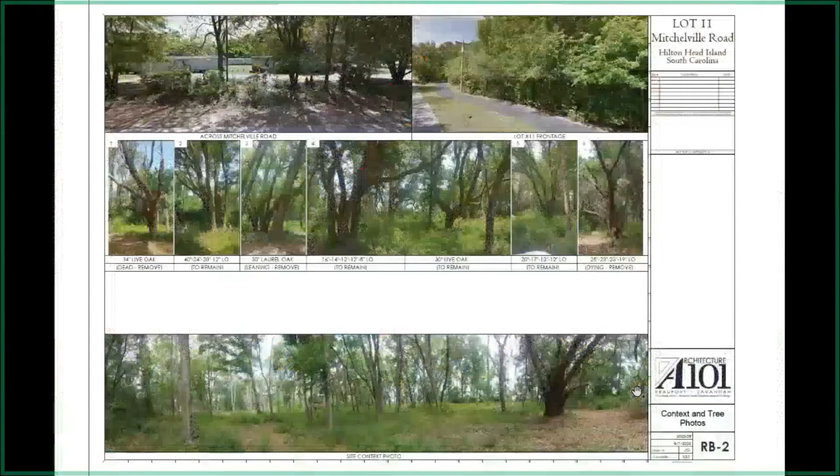Staff recommends conceptual approval with a suggestion that staff comments be added to the Notice of Action as conditions. So here are just some pictures of the existing vegetation on the site.

This is the conceptual site plan. It's included because the significant specimen and significant trees are noted.

This is the conceptual site plan with the tree removals requested, or that will be requested. You can see the wetlands out here.

This is the layout of the 3 buildings, the large one in the back with the 2 out here, and the pool deck. You can see the pool buildings here and the beach access here.

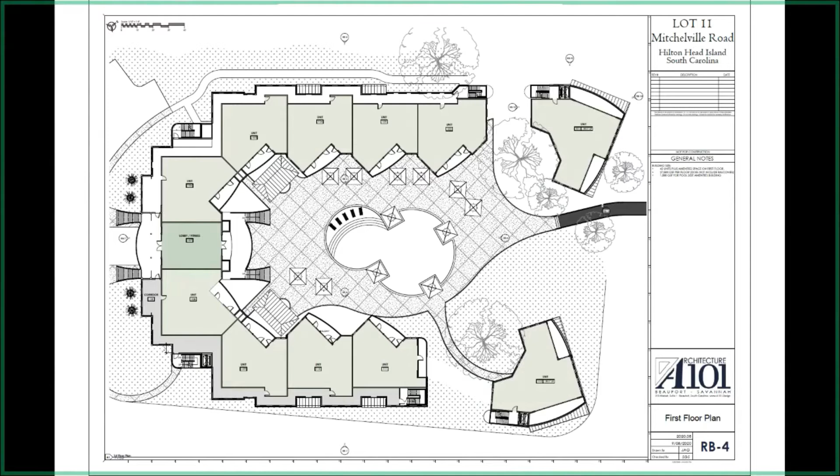This is the 1st through 4th floor levels. This is the roof plan for the development.

Here you can see the front elevation of the building and a side elevation proposed. Again, the rear and a side. A section through the building.

These are the ocean side buildings. Again, looking straight on and a side view.

And looking out towards the ocean at the top and looking back into the development at the bottom. An illustration of the side setback and angled setback.

That concludes staff's presentation.

Thank you, Chairman. Yes, I certainly appreciate the consideration that the applicant has put towards the previous comments. I echo staff's sentiment about the parking circulation still being a little tight, especially for underbuilding. Looking at those two smaller buildings, they seem to be the ones that are the sticking point for that particular item.

Another thing would be just confirming wetland setbacks and knowing that that'll be in final - your setbacks for both your building and your impervious surfaces. I know there's a wetland impact on the front part of the portion, is that correct? That's correct. Okay, we'll just want to make sure that those buffers and setbacks have been respected there.

And finally, I see the 15-foot tree protection zones on the plans, but I'm not noticing where there was a canopy survey for those significant trees. Knowing that these trees are kind of in a wooded condition where they're probably more upright, especially seeing some of the photos, it looks like they're more of an upright condition. It'd just be nice to know if there's going to be some significant limbs or something given that you're going to have these tall structures surrounding these trees. If it really is going to be a greater impact to those trees, considering the proximity to those buildings, having a canopy survey obviously helps to understand the limits and what's being impacted there.

And I realize that would be at the cost of more units. I think that's still the challenge, from the views that one's really going to see - the public is going to see it a lot from the beach - and from that, massing wise, to me it still reads very much like the last submittal.

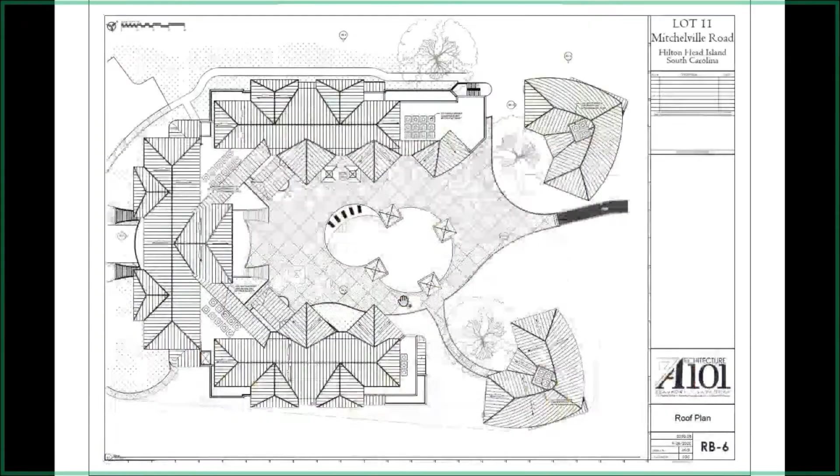I do appreciate the move of the pool building being backed up against the building, and therefore opening up the views both from the beach and also for the residents, completely out towards the beach. I think that's a really good move relative to where that pool house was one larger structure sort of blocking those views. So I really appreciate that move.

I had a question, this is probably more for Chris, on the west elevation angle setback - I'm not that steadfast - is that allowed to cross over into the roof overhang? It's my understanding that yes, that eave can penetrate into that setback, but I will check that. Okay, that was just something that kind of caught my eye.

It still just feels like a very massive building. I'm wondering if an articulation on the surround of the garage level would help break that down. I think some of the things that are working well with helping with the massing are those dark brown vertical elements that are piercing through all the way down to the ground. I also see that you took some of the base material and brought it up one floor. All of those things I think are helping. I think the facades where it is identical on all four floors - those are the ones that are still hindering the massing from feeling less large.

If you could turn to, I believe it was sheet RB 12. Perfect, thanks. And again, I understand this is just a rendering here, but when I look at the top picture...

I think that's probably the best example of the plainness. I love the front elevation, I love what you've done there, I think that breaks it up a lot. But looking at that top picture right there, seeing all that horizontal lap siding with the white trim around the windows, it looks very much like a tract home, production home, which I'm sure is not your goal because so many of the other elevations just look so much more exciting than that. And perhaps this is just this one perspective, but I think that's a very good example of where the project still has room for improvement.

Looking at that same sheet, RB12, the bottom picture, the elevation facing the ocean with all the sliders and railings on it, I think that looks great. It breaks it up. But the outside portion seems like a large expanse of 4 floors of nothing but horizontal lap siding with white windows. Maybe take some of the interest you have in the other elevations and apply it there, whether it be a different color on the first floor to break up the massing, or introduce some vertical elements that tie the windows together. I think there's an opportunity to make that a little more interesting.

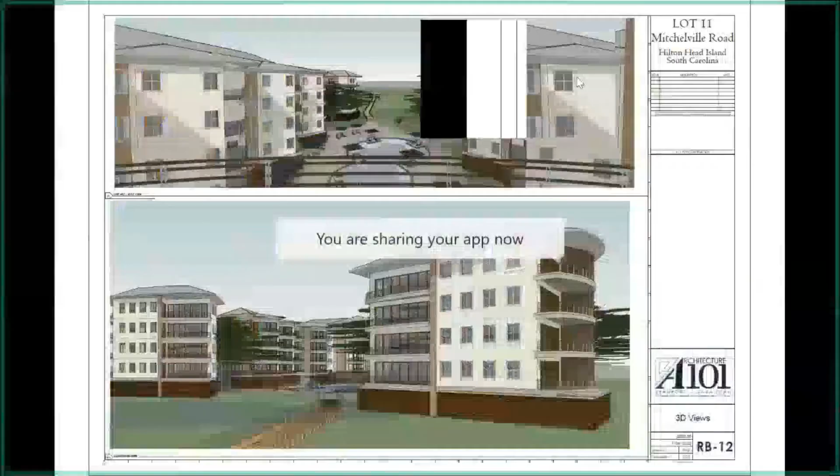I wasn't here the last review, so I don't have a lot to comment on how it's changed, but from my first visit, I'm really disappointed at how austere it is. It's a beachfront place, it needs a lot more texture, a lot more in and out, a lot more activity with the surroundings. It seems like there's a hotel right on the beachfront, and Mitchellville, especially in that area, is all natural, and this doesn't appear natural to me in any way, shape, or form. I'm not discounting your architecture, I think it looks lovely, but I don't think it looks lovely on Mitchellville Road on the waterfront. If you could have different textures, different roof levels - I understand you changed them from what the board suggested last week, but I'm still feeling this is a big, solid structure without reference to the environment. That's all I have, thank you.

Okay, thank you Ms. Foss. Kathy, since you weren't here last time, what is your feeling on the scale of the building? Too large.

It's just dominating that beachfront. As I said, it's all natural there basically, and it dominates it and takes front stage when we don't need that here. Okay, thank you.

Yeah, I'm going to sound repetitive from last time. I think the building looks great. I love the plan, I think you did a great job laying it out. I like how the pool's secluded. I like how all the units have views. It all works for me. I just wish your lot was 50% wider.

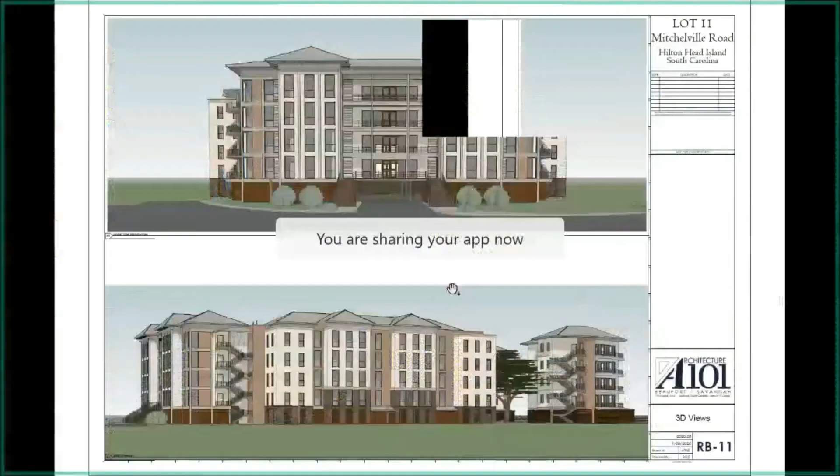that in itself isn't really the solution we were looking for, I don't think, because we want roofs, we don't want flat roofs. So I'm pointing, and you guys can't see what I'm pointing at, but that bottom drawing to the right where it turned into a flat roof - there we go - it didn't help the cause because it's still a 5-story wall.

So my thought is, and to put this into scale for everyone, those that were here for the Gardner Drive, just for comparison purposes, the old or current Christian Academy site that we reviewed - I think probably half of us reviewed it - those were 3 stories and 4 stories total. These are 5, and I just think it's too tall.

I think that front elevation's attractive, I think that could actually maybe stay as it is because it's the short side of that building facing the neighbors. So they're seeing only, if you look at that bottom left drawing, the neighbors are really only seeing the side elevation on that particular building. It's when you turn the corner, parallel to the lot where the cursor is, that stretch right there, it's right up on the property line, and it's just big. I think that needs to be a story less.

Judd, I have a question for you. But before I ask, I think there needs to be a little bit more room between the fire lane and the face of the building. Right now it only looks like, if you could go to a site plan... yeah, right there, that to me doesn't look like enough space to get in any type of foundation plantings. One of the drawings had an arrow pointed to it that said foundation plantings. I'd like Judd to comment on that.

I don't think that's enough room to do anything to help soften a 5-story building. And then particularly on the fire lane side, even the buffer, was that 10 feet? Can we get anything in a 10-foot buffer to hide a 5-story building or help obscure it? Judd, that was kind of directed at you, could you make a comment?

Yeah, Judd, go ahead. In a word, no. I mean, obviously, when looking at a large building...

You want to kind of, especially when you think of those buffers, it's almost easier to front load those and load them towards the property line, because that is the foreground for anybody outside of the site. Yeah, I mean, it's going to be hard pressed to get anything up against the foundation that's going to have any kind of height. I mean, that drawing on the bottom left is a dead giveaway for that little dinky green spot right there.

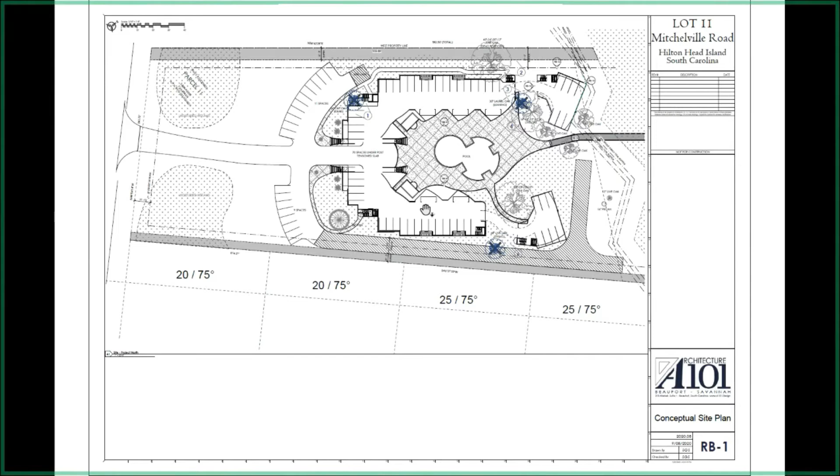I'm trying to remember what's in that buffer specifically. There are certainly some trees in that buffer. I don't know that there's any large trees in that buffer. I mean, if those trees are there, and you fill up where the trunks are, then it makes a case, but I don't know that they're there.

So, all right, I can confirm if you'll give me a second. Okay.

All right, I got it. There are, down that line, a couple of water oaks. There's a 36-inch pine right on the property line. There's a 48-inch live oak adjacent to the property line on the other side. There's a 30-inch pine, a 24-inch pine, and a couple of smaller cherry trees down that buffer. And that's, I got it here too.

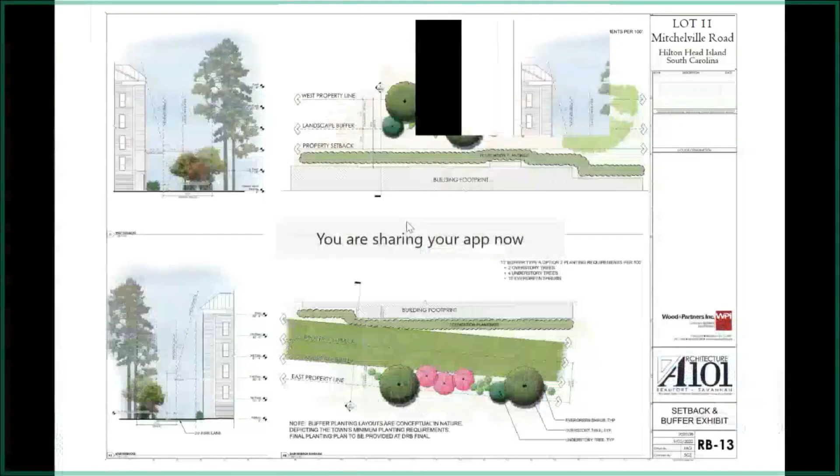More articulation of the windows in the pool courtyard facing away from the ocean. Steve, that was from what I remember - there was a big blank wall that had no windows in it. Did that get covered, right? Yep, yeah it did. Okay, so you took care of that one.

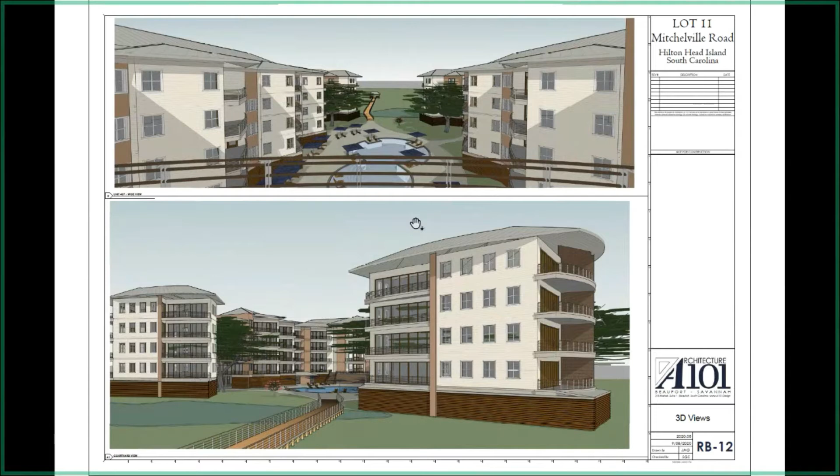So the big one is the next one, the more variation in the height of the roof line, and to mitigate the building height. I still think that needs to be addressed. The HVAC units are on the roof - I saw them on the plan, hidden, which is nice. Additional information on the wetland buffer, and Judd had also brought that up in his comments. A further developed landscape massing plan. The specimen trees we addressed, but that will have to go through BZA approval. And then what we all want to see is the planted tree should be a larger caliper than the minimum requirement to balance the scale of the building.

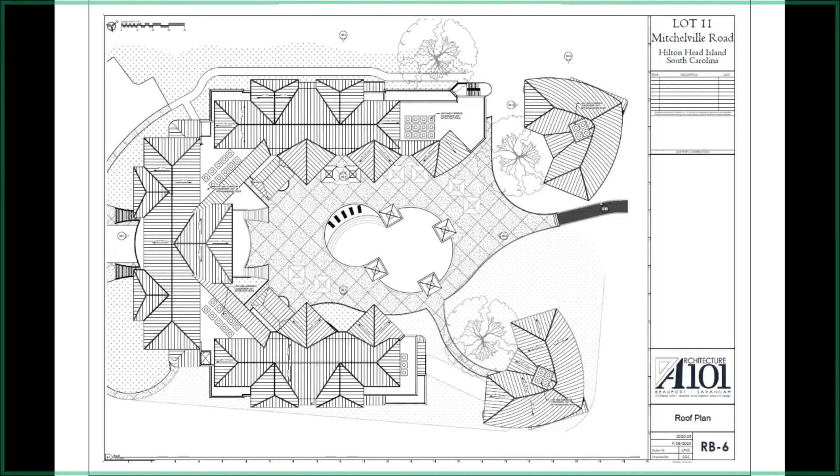So what I'm going to do is open up the floor, unless anybody has any final comments. What if I could, Mr. Chairman? Yeah, go ahead, Steve.

I was going to mention, speaking to the 4 stories versus 5 stories - we did study dropping the scale of the buildings down in several ways, especially towards the end as it stepped down towards the ocean. And we ran into some very tangible, very practical egress concerns in terms of where that egress stair would come into, and not having to have 2 or 3 different sets and dead-end corridors on the long end line. So I didn't want you guys to think we didn't take your comments to heart, because we did study that. Particularly I was trying to step down the building at the hinge point, because I thought that would actually work really well to de-emphasize the scale of the building. And again, we ran into the same very tangible issue - you still need a 4-story or 5-story egress stair out of some of those portions of the building. So I wanted to mention that.

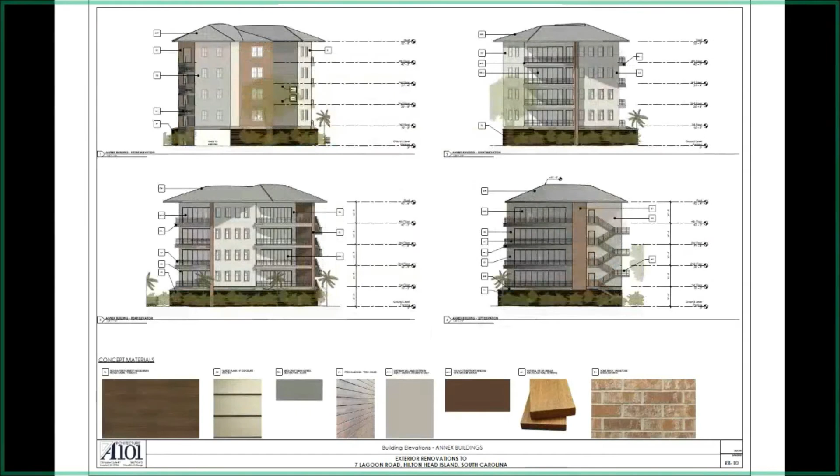What if, like I said, you didn't shrink that top elevation - what if that was there and the stairs were what they are, and then on the bottom, that next building is a story less, and the building to the right is a story less. When it comes to this, is there any way that the garage, or the driveway and all that area, could come up? Yeah, I think it's just a little flat when it comes down to it.

But hold on one second, John. Getting back to making sure the side building—I understand having some low areas, I just want to make sure that there's good.

Wait, who is talking there? Couldn't tell who was talking. Can everybody hear me? I think that was Judd, but I don't know. He was talking to the group. Oh okay, alright, you kind of threw me off.

But if the side buildings were one story less, you still have the stair there in the corner, correct? Unless I'm missing something. That's correct. Okay, yeah.

Okay, that's fine. So the two kind of separate structures closest to the ocean, are those the two buildings that Michael was suggesting to drop down one floor less? I think everything parallel to the sidelines has to be dropped a story, so it's that whole length. Okay, not just the two separate buildings closest to the ocean, because it's that particularly main mass that is, for lack of a more creative word, massive. It's just too massive. Are we able to switch to sheet RB11?

Did we catch you napping again, Chris? Or are we able to switch to RB11? If you could give me just one quick minute, if you don't mind. Okay, please. I'm sorry. Thank you, that's fine.

So while we're waiting on Chris, I don't know, am I unmuted? Yeah, okay. I do want to say that I would be remiss if I did not say that while I respect the fact that scale is a concern with this project, the loss of the top floor may very well push this beyond the point where it would be economically viable. So I know that's not your concern, but I do think it needs to be noted. Okay, yeah, I mean you're correct—that's not part of the design guideline consideration, proforma, and things like that. We're just strictly aesthetics, colors, and scale. So, but it's been noted.

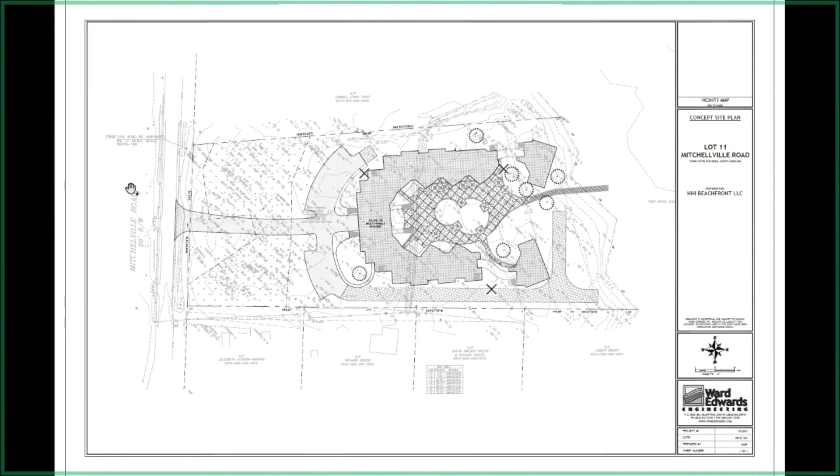I don't necessarily have any divine intervention here, but there was that one elevation where it looks like you brought some of that darker color up to the first floor. I don't know if it's physically needs to be less than 5 stories, or visually it just needs to appear less massive. On RB11, you see in the center how that darker brown color is pulled up a little higher. With a proper landscaping plan, it might visually only read as if there are 3 stories where you see the lighter shade. I don't know if that would be a happy medium that allows the client to get their density, so financially it makes sense for them, but at the same time, visually it just doesn't feel so tall and top heavy, for what that's worth.

I think for me, the key to getting behind the massing is really those 2 detached buildings having to come down a story, that would be my bare minimum. On the side elevations I still think they are massive, but bringing up one floor like Mr. Milewski said does help the massing. Without those 2 detached buildings losing one floor, it feels like none of the other massing elements or changes have been enough. Trying to be realistic, I realize we're not factoring in ROI, but that step down of those 2 buildings would let me get behind them.

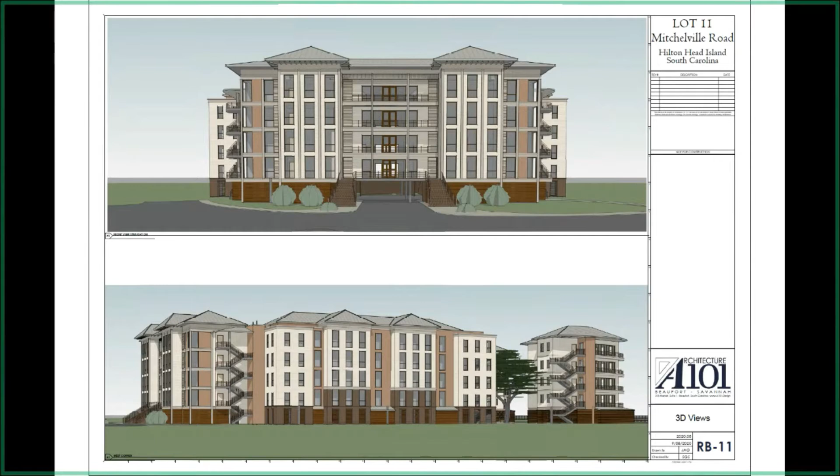Okay, all righty. Would anyone like to make a motion? Okay, I'll make a motion then.

Okay, here we go. Regarding Mitchellville Lot 11, DRB 001801-2020, motion to approve with the following conditions: all staff comments are added to the NOA as conditions. Those include, for reemphasis, that all wetland setbacks are confirmed, a survey canopy of the specimen trees is provided, consider additional ways to bring down the scale of the building, including materials or design elements encapsulating the first two floors to break up the massing. It's not a requirement but an alternate would be appreciated. And applicant to consider 4 stories instead of 5 in any areas possible.

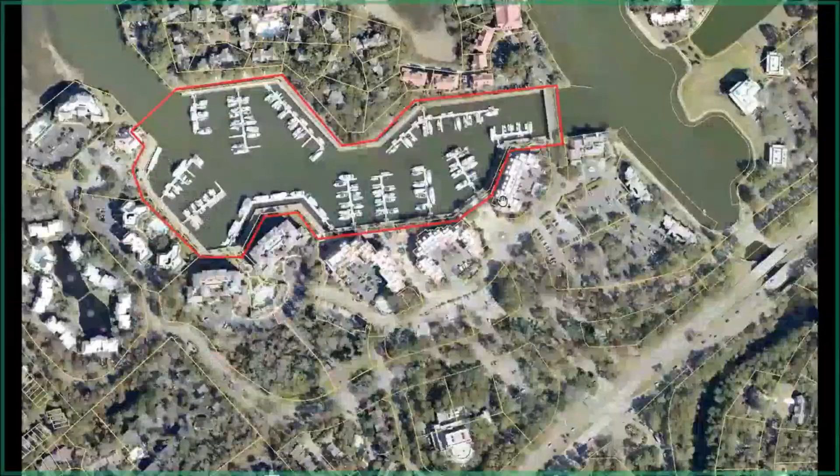Phase 2 was basically from the middle of the harbor, where, if anybody's familiar with it, Captain Hook sits, the boat, all the way to the Disney Bridge, and then next year the Disney section. Yeah, it's just not feasible budget-wise to do it all in 1 year.

Okay, so on your submittal, even if it's that plan marked up and some of those lines are red and the red lines are phase 1 and the blue lines are phase 2, can you make sure we know what's what for our consideration? Yes. And then we'll also need a scale drawing with dimensions of a 12-foot section of this.

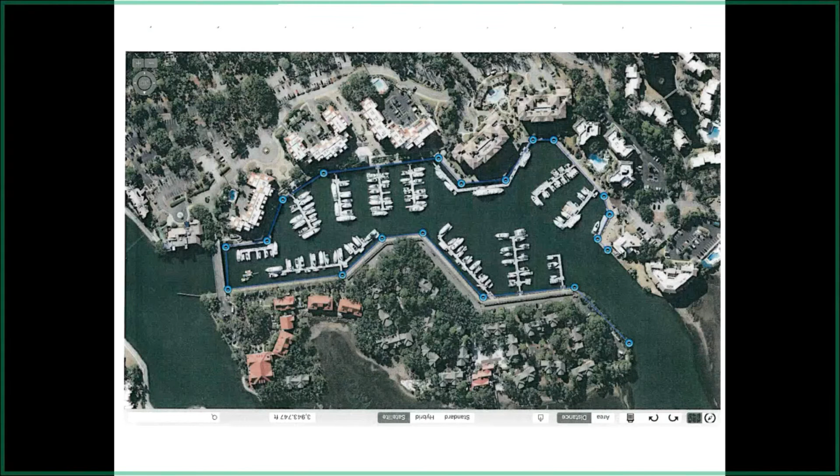And from what I'm gathering from everyone, if you took that heavy middle rail and raised it up to the top and replaced that rail with a cable, painted it in gray, I'm pretty sure you could get that passed. Anyone disagree with that comment?

Ms. Voss, go ahead. I don't think if that middle rail got moved up to the top, it needs to be that big. It should be probably half the height. If that's a 4x4, maybe it's a 2x4.

Okay, and then the reason that, and I agree that you copied what was existing, but the reason the existing middle rail kind of works is that it's got some carving out and it has a little bit of curve to it where it meets the vertical post and narrows down a little bit. If you can't do that, then I agree.

Just take it away, move the little narrow piece up to the top and do something at the bottom. But it's up to you to figure out if people are going to be able to climb up on those things. Thanks.

Okay, thank you. All right, Mr. Molesky? And not to play designer here, but if we were to change those vertical components to every 8 feet...

I believe that in the interim, every 4 feet, there's approximately a 1 inch diameter stainless steel spacer that could go in there to keep the cables from sagging. And I'm sure from an engineering point of view, directly underneath the grab rail, they could put some type of quarter inch or half inch support that would provide the structural integrity, and then the grab rail would just be aesthetic. The reason I say all that is, to me, that is more in keeping with a current railing design, instead of trying to copy something that was done 20, 30, 40 years ago. But thanks for listening.

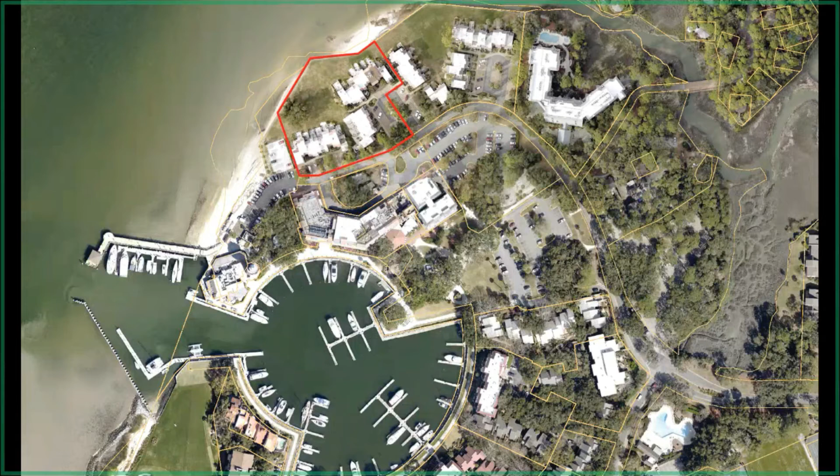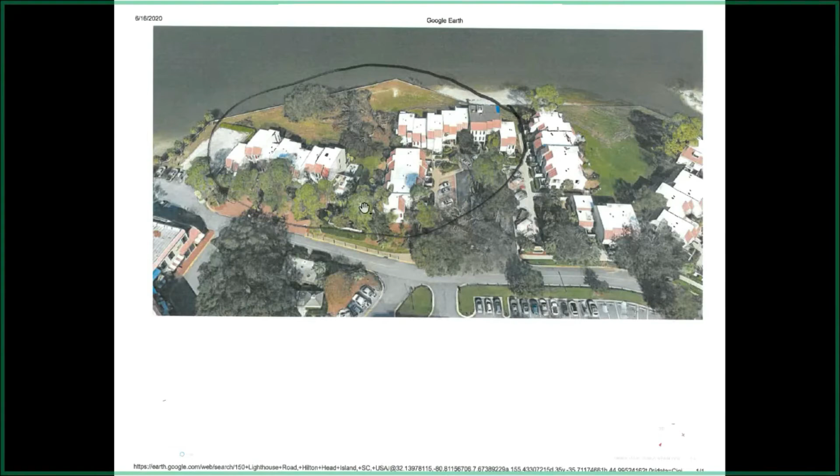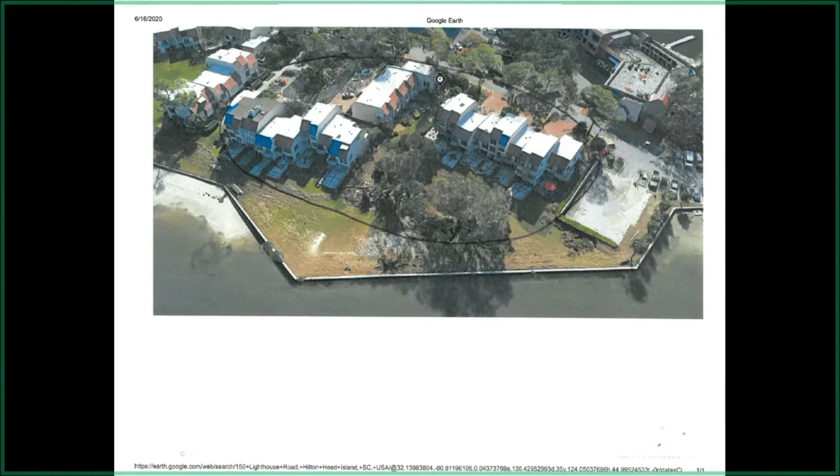This is an aerial of the proposed site. I believe the unit is right here, it's this unit right here. We'll get a better look at it later. Again, it would be the unit right here. Just an example of the 3 stories in this development compared to the 2, and there's 2. Just 2-story here, going to 3 and 2. I'm sorry, let me back up here. I believe this is the picture of the unit in question right here.

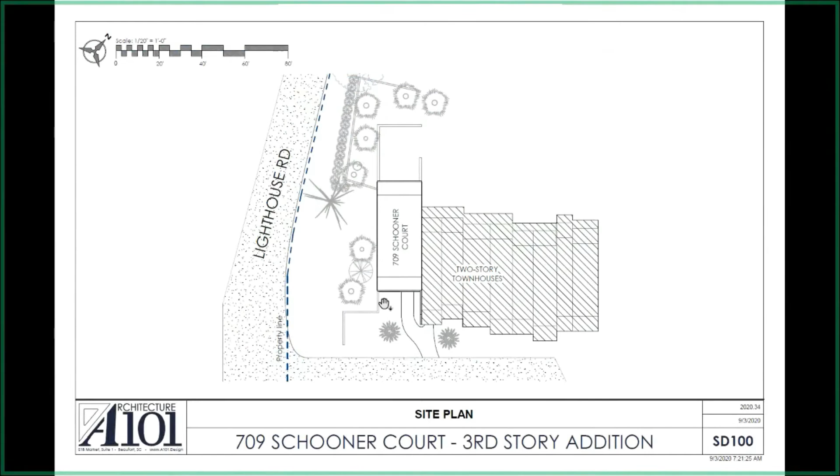So this is the unit. Again, you can see Lighthouse Road. There's the proposed floor plan, wall sections, the existing conditions, and what's proposed.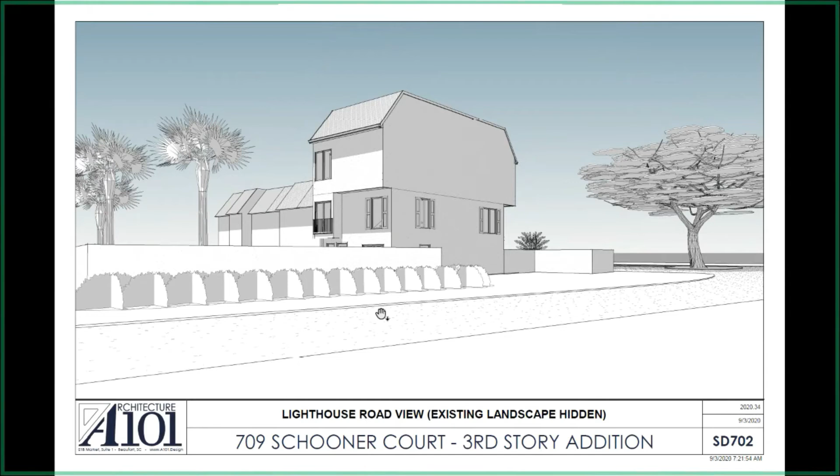So this is the existing front and side, the Lighthouse Road side, and what you would see once it's complete. The back side of the building and the opposite side, and what it would look like once complete. That's the front side, parking lot side, and the water side.

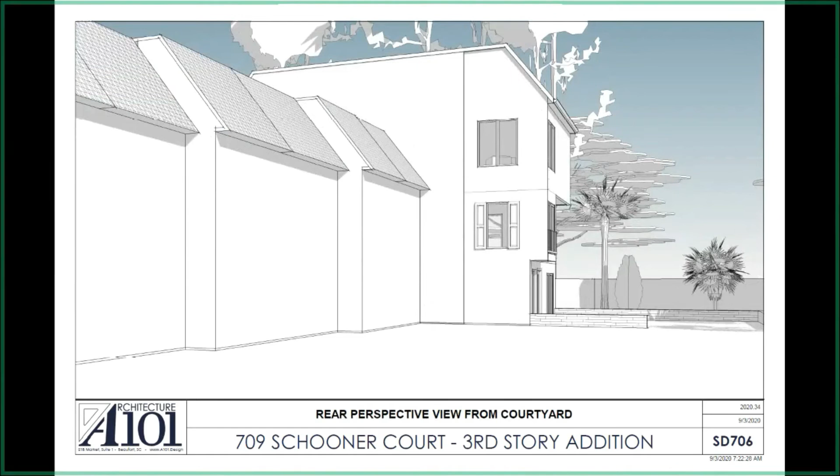Again, staff recommends approval with the conditions stated.

Chris, question for you before you leave us. These are the same units as the color change, right, from last time? Yes, sir, that is correct. Okay. And I think that was only, okay.

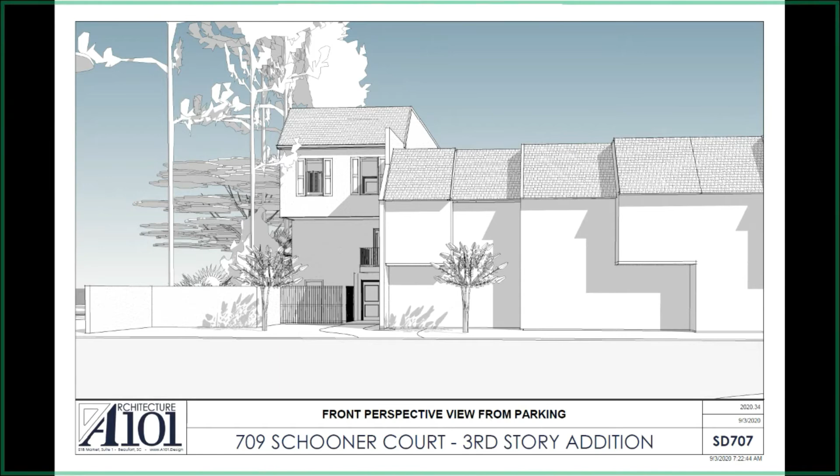So when you say window frame to match existing window frames, shutter to match existing, that's going to all be per the new approved color scheme, correct? Yes, sir. That is the thought process. Okay, I just didn't know if we needed to specifically state that in a motion, which I think we should, that it will match the new approved color scheme.

Does that sound like a good idea to you? Yes, sir. Staff loves clarity. Okay. Be specific. All right.

Is the applicant present? Is Steve on? Yeah, I'm here. We get Steve again? Yep. All right, I'm here. Hey, guys. Yeah, we can hear you, Steve.

So you know how this works. You have 10 minutes. Would you like to add anything to Chris's narrative? No, the only thing I would add is that the local regime was very clear that they wanted it to match the existing units as closely as possible. So we also tried to take our lead from several other projects that have already done this exact renovation. So most of the architecture you're going to see matches what's there and what has been done previously.

Mr. Chairman? Yeah, go ahead, Chris. There's a point that I missed. This is pending approval from Sea-Pines ARB. It's my understanding that it's in front of Sea-Pines ARB as we speak, but per the LMO, we need to get a determination from an ARB prior to your all's review. So this is moving forward as for comment and courtesy to assist Steve with design so that he can move forward with that, and we'll be coming back for final approval.

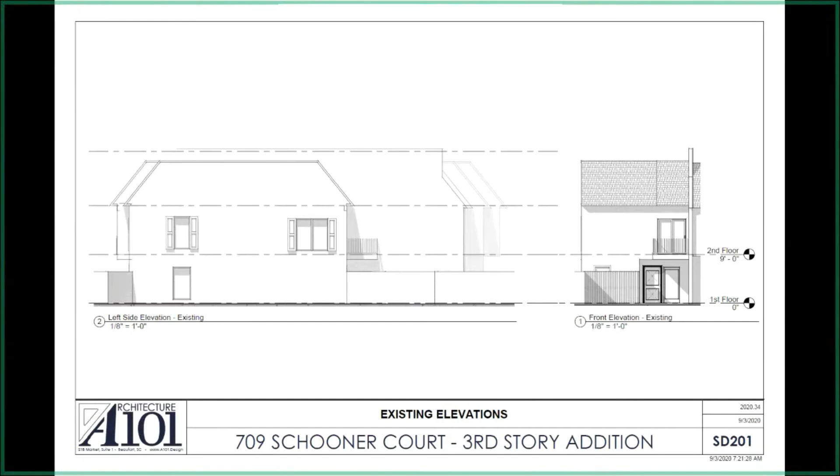Yes, proposed. Because to me, this unit is unique in that it's parallel to the road, I would like to see some articulation on that blank wall. Everything else I'm fine with. I think it does a good job of matching what the other ones have done.

The only other question I have for Steve, and I know we're not reviewing this, but it affects the aesthetics: have all the firewall conditions already been addressed as far as whether something has to get extended, or are you just doing it horizontally? I know you can do firewalls horizontally 4 feet, but it might affect the adjacent units. So I'm asking if there's anything on the elevations that might change due to the firewall of the raised story.

Let me take those. The firewall, we believe we have taken into account on all sides, because we have a higher roof line than our adjacent units, so that firewall does carry on. The other side, it is a two-sided firewall, as you would imagine.

On the Lighthouse Road side, it's our owner's strong desire not to have windows on that facade, simply because there's a hotel that directly faces it, so if they do have windows, they're going to be closed all the time just for privacy's sake. It would be a window just for the sake of the exterior, so we're proposing it this way to avoid having a window that really serves no function.

David brought up a good point about that one window being above the other one and not having shutters. I understand the issue of wanting more light in the space, but we already had comments when this project first came before us that there was so much going on with all the canopies and different balconies and fences. I would like to see more standards brought into this, and if you've got a window, it needs shutters, in my opinion. That's what has already been brought up.

I also agree with staff's comments that the windows, shutters, and approved color schemes need to be matched. Thank you. Okay, thanks Kathy. All right.

Annette: could you put that elevation back up, Chris? It was just up there—the right side and the rear, I believe.

Everyone's comments continue to progress, and I agree with all of them, with Annette doing a lot of the heavy work there.

The window on the right side elevation relates more to the one below it than the one on the rear, so I don't see why those two that have arrows next to them would need to match. I think that window needs to match the one below it with the shutters, which I believe was Kathy's point.

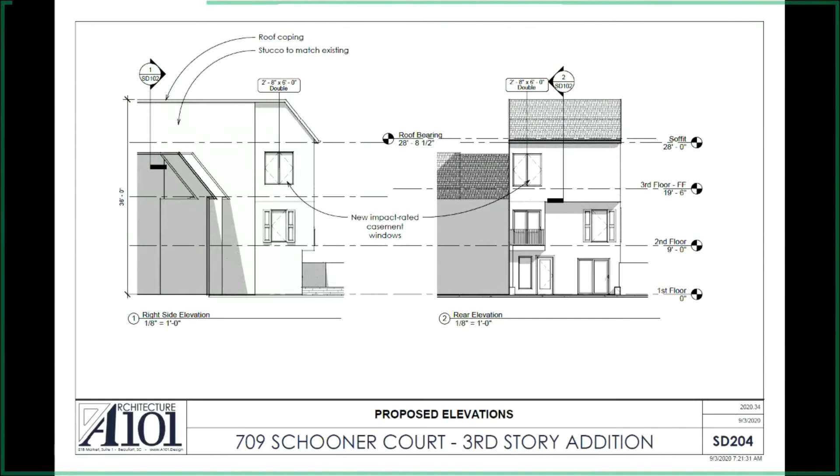Then on the left side elevation, right there, total agreement with everyone. Third floor needs to have windows. I know they don't want the hotel across the street to look at them, but they already have windows on that side, so I think we need windows that fit the pattern of what's there.

One of my personal pet peeves is shutters that don't fit the window, which would be the double window to the right on the left side elevation. I would either do no shutters, since that's more like a door than a window, or do appropriate size shutters that are different from the other one. I'd probably just leave shutters off that one given the size of the window.

And the third floor windows, whether there's two or three of them, should appropriately align with that elevation because it is very prominent on Lighthouse Road, and it actually sticks up above the privacy wall and the landscaping, so you're going to see that.

I think that was pretty much a universal comment that there needed to be something up there, but I would go the full step and do windows rather than try fake shutters or anything like that.

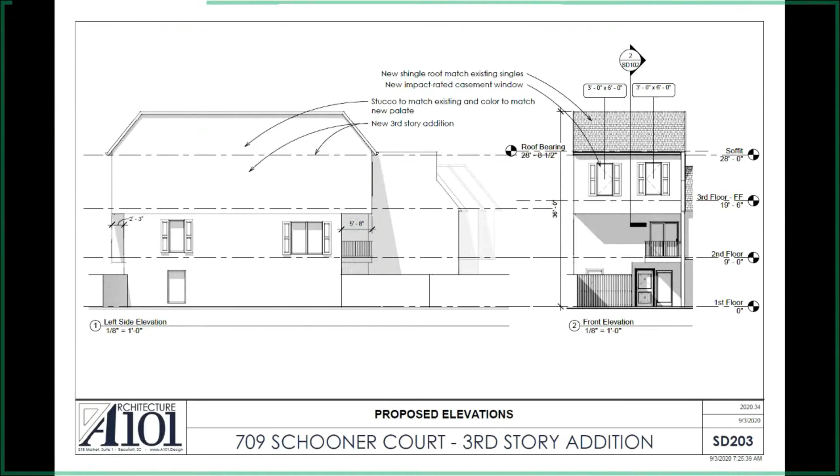One thing I'd bring up, Chris, if you could show that 3D view - I sent a photo of the existing landscape condition along Lighthouse Road. There is a very large tree on that side of the building, so the windows we're talking about adding on that third floor are really not very visible at all. I did try to match that tree as closely as possible for this rendering, and you really cannot see that third floor from this perspective. I wanted to add that to the discussion.

Well, that'll give them more privacy than from the hotel. Yeah, I don't think they're going to win that argument with us. I think we're going to need something there, and I think that's the right answer - something just needs to be there.

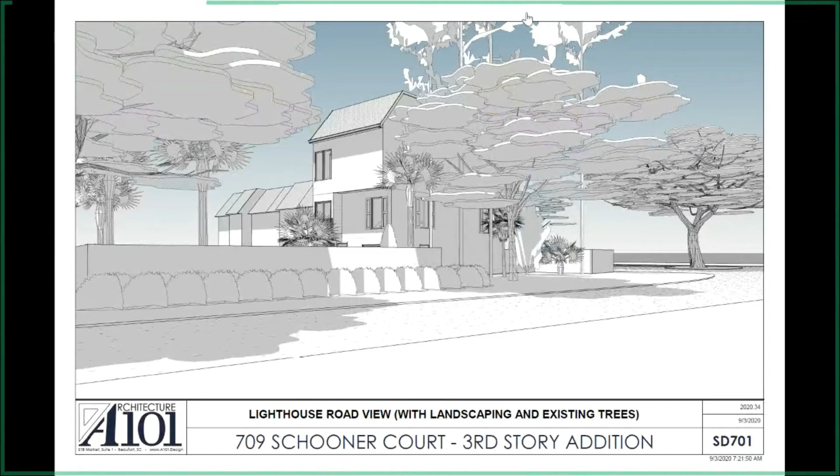Annette, you have your finger up. Yeah, just to explain that - I don't think we can count on a tree. All we need is a storm, or that tree to get sick and die, and now we have this massively exposed facade. So I think we have to consider that the tree could disappear. Yeah, and that's pretty much a DRB staple, that you can't rely on the landscape.

All right, Chris, do I just table this, or do we need a formal withdrawal? What do we need to do here procedure-wise? If the board will entertain a table, then you can table it; otherwise, the applicant will need to withdraw. Just a reminder, if the applicant withdraws, he essentially loses his application fee, but with tabling, you can preserve the application fee. All right, we'll do Steve a favor and table this so he can save his application fee.

I would just like to reemphasize that we are tabling this pending the outcome of the Sea Pines ARB review. Would someone like to make a motion? Annette, go ahead please. I'll make the motion that we table this pending Sea Pines ARB review and recommend that the applicant has heard our comments.

Application 001794-2020. Mr. Karstens will be recusing himself from this project. Yes, sir.

And Chris, would you like to take it from here? Yes, sir, thank you, Mr. Chairman.

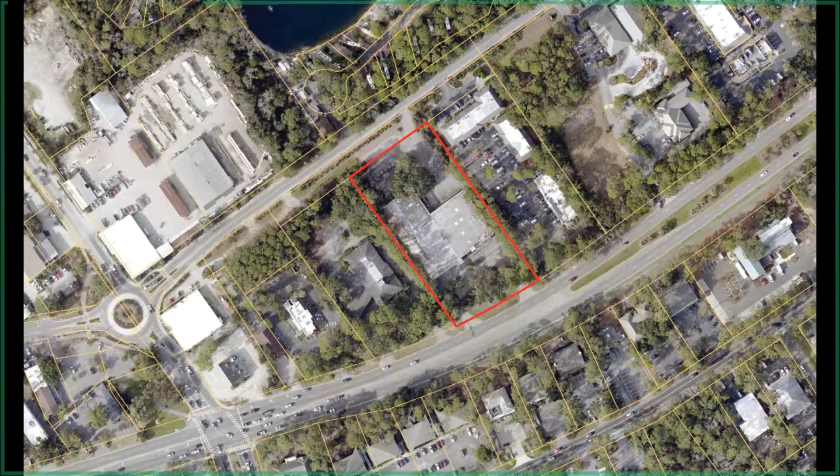This project proposes to redevelop the 2.3-acre former Grayco hardware property on William Hilton Parkway into a multi-story, climate-controlled self-storage campus. The site contains 2 specimen trees and 4 significant trees.

There is a 20-foot side building setback and 50-foot setback off William Hilton Parkway, along with a 20-foot setback off of Dunnigan's Alley. A 50-foot front buffer will put the building mass behind the existing tree canopy and provide room for additional planting areas. Specimen and significant trees will have town-mandated 15-foot tree protection zones around the trunk.

The placement of proposed buildings and parking uses existing impervious areas left vacant by the demolition of the existing building and asphalt. The proposed redevelopment impervious coverage will be less than the existing site impervious coverage and below the LC, light commercial, district, which allows 60% total impervious area.

The existing underground detention will be used and expanded as necessary. The project will reduce the curb cut access points on William Hilton Parkway from 2 down to 1, and maintain the Dunnigan's Alley curb cut for vehicular circulation. The driveway will be improved to accommodate moving trucks.

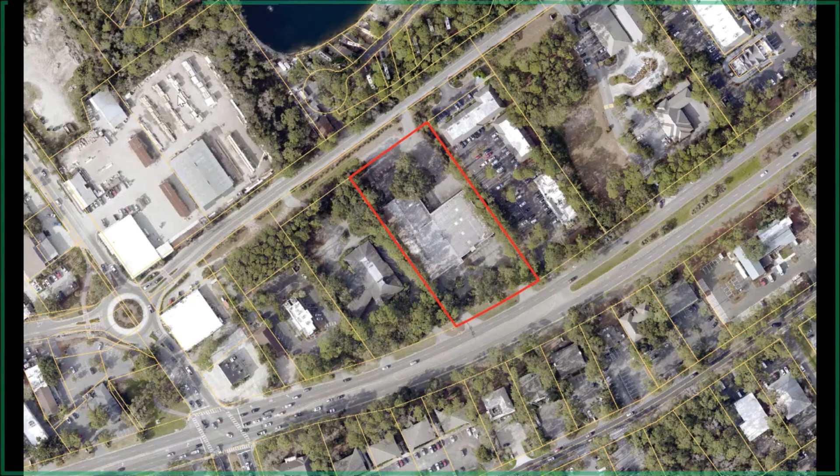Does everybody know where we are? If you don't, please raise your hand and let me know. Seeing none, we're moving on.

Again, the existing conditions. This is the adjacent property, now a recently redone Goodwill, and Panera is on the other side of the site, and this is the site. So this building will be demoed.

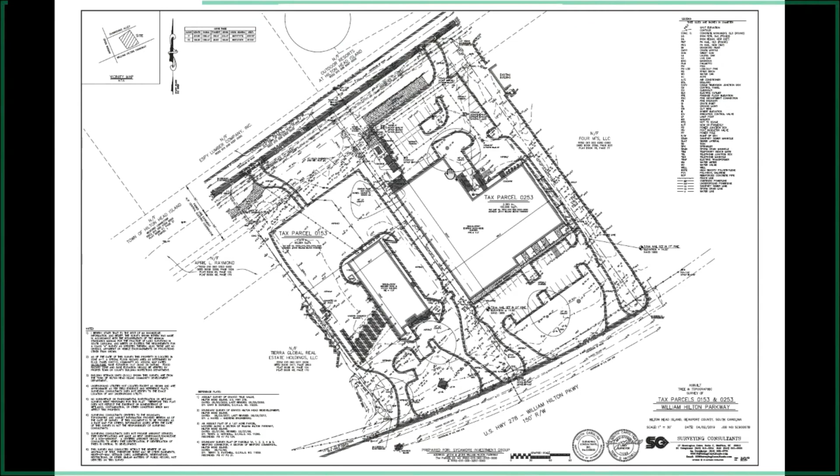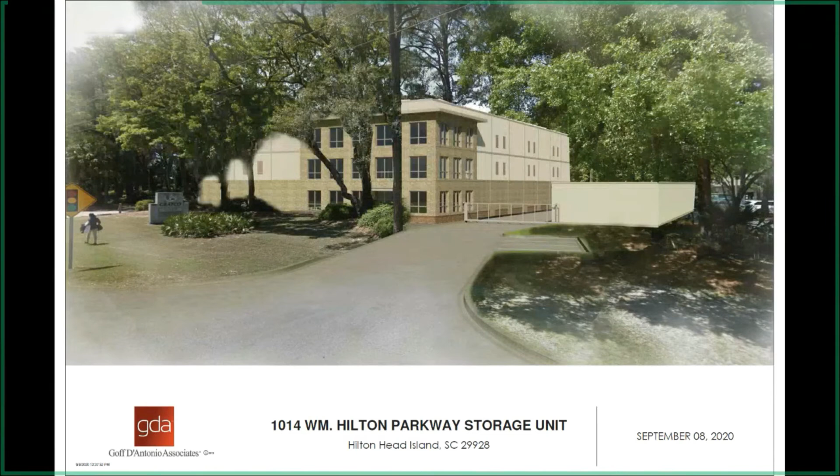That concludes staff's presentation. Okay, thank you, Chris.

All right, the applicant will have a 10-minute timer. After introductions, I see Mr. Witmer. If there's anyone speaking, please introduce yourselves up front, and then whoever can take over and add to Chris's narrative.

Brian Witmer with Witmer Jones Keefer. We're the planners, landscape architects, and Eddie Buck is here. He'll probably speak as well.

I'll go first. As far as... Brian, let me interrupt, I don't see the architect online, FYI, on the meeting. Okay, thank you. Well, Mr. Buck can probably answer some of the architectural questions if Tony is not with us.

I'll speak to the site and the landscape. Looking at staff comments under natural resources and miscellaneous comments, I think we can work with most of the comments that were made. We had a comment about adding bollards around some of the significant trees. We can do that. We have worked around the significant specimen trees on the site plan, and we can continue to refine the plan a bit to make sure we save those.

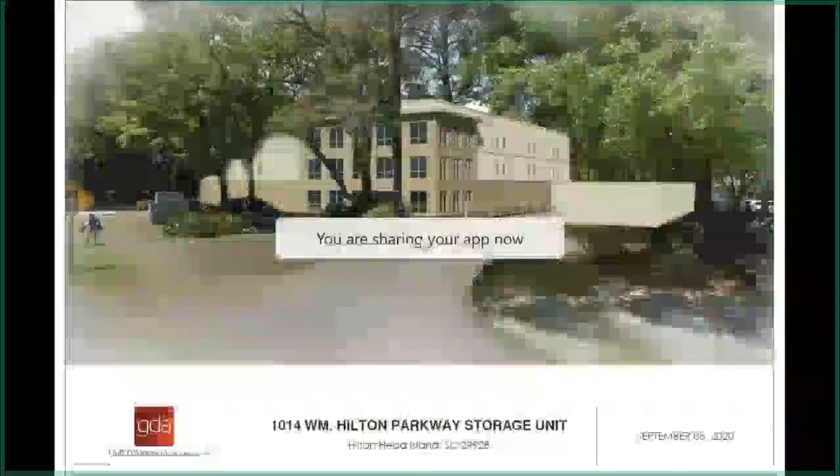Other comments were to add a site analysis plan. We can do that; we had one in place, but we can add to it and better define that. Another comment was to adjust the alignment to Dunnigan's Alley. I think we can make that site plan adjustment to better align the rear access to Dunnigan's Alley. I don't see any problem with that.

There's also some comments about refining the perimeter fence, and I think we can make those adjustments as well, modifying the location. There's also a comment to add more landscape on the entry drive on Dunnigan's Alley, and I think that's addressable too, we'd be happy to do that. So just walking through the site plan and landscape comments, I understand staff's comments, and I think we'd be happy to make those refinements.

On that, I'm going to let Mr. Buck talk about architecture or any other items before we go through comments.

Thanks, Brian. Mr. Buck, I think you might be muted. Hey.

Hey, this is Ryan Lyle, Andrews Engineering.

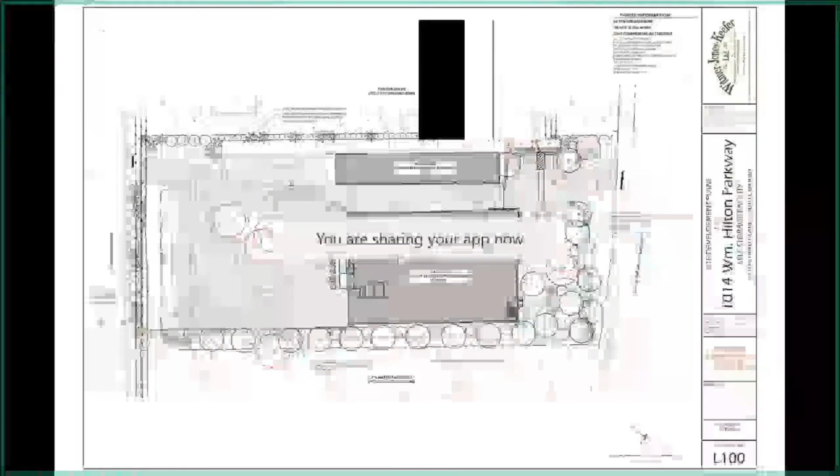The architect couldn't be on the phone today, so I'm merely a civil engineer, but we did collaborate with the architect and tried to meet some of the goals of the town. So just to speak regarding the site plan that we coordinated with Witmer Jones Keefer, the building placement.

I did want to bring up to the board that we are proposing the phase 1 building. That's the large structure, and we do plan to phase this. Phase 2 would be the longer, more narrow single-story building on the northern property line.

The fencing, we're proposing a wooden fence, board on board, and as far as the architecture goes, we have given a water table, or accentuating the first floor with brick, and really trying to pull out the front facade that addresses William Hilton Parkway and the office space with storefront windows.

So on that, there's the east elevation, maybe shows it best, and the south elevation that fronts the William Hilton Parkway. That's our main office entry.

Currently, the site is below flood, and we'd have to elevate the base. We'll elevate the first floor to meet base flood elevation, so raising roughly 30 inches high. That's why you see a switchback ADA ramp with handrails.

And so the office door would be on that storefront, and we thought it looked most appropriate to add the storefront windows all the way on the second and third floors. This is a climate-controlled self-storage facility, therefore, not a ton of windows, but this seemed appropriate and aesthetically pleasing.

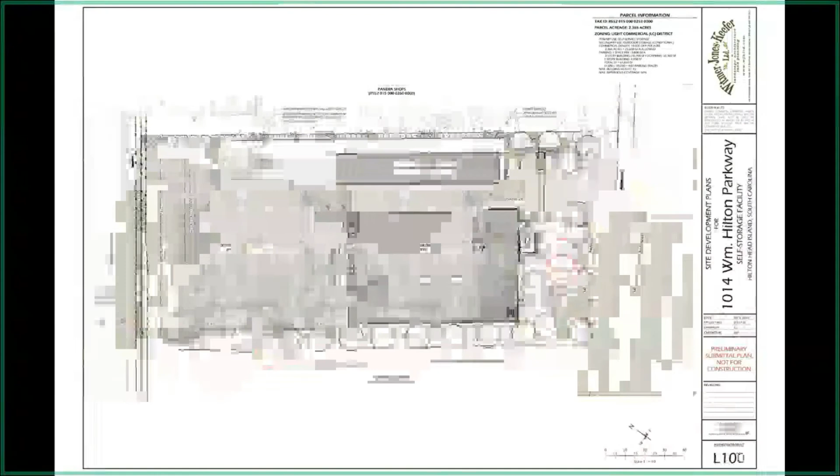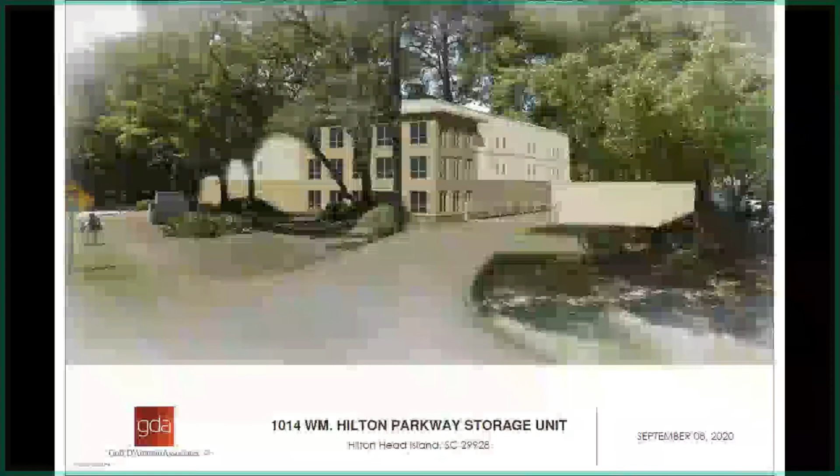All right, first of all I'll go ahead and say I'm probably going to focus more on site stuff since I'm the only landscape architect who's going to be reviewing it today. In general, I'm in agreement with a lot of staff comments related to the building. I think my biggest comment would be related to the roof line and maybe trying to see if there's something you could do to break up the roof a little bit and have a little more architectural detail on that 278 facade. But I'm sure we'll get more input from the board on the architecture.

Just moving to the site. As a general comment, to me, it feels like there's a lot of pavement here. And I know that you guys said that there's going to be less impervious than there was previously, which I certainly appreciate. But there's some stuff that it feels a little excessive to me. Maybe you can provide a little clarification on what the intent is behind some of the space and the thought process.

For example, looking at our 3 specimen trees in the back, which I'd certainly appreciate you guys working around, that pavement edge looks like it's basically just following that 15-foot minimum clearance zone from the tree since it's a specimen. It kind of seems like dead space to me. I understand that some of this area is going to be used as outdoor storage, but not understanding why you would pave it in that shape, it seems like that might be an opportunity to give those nice specimen trees a little bit of breathing room. So that's kind of my comment for that space.

And I realize that this is outdoor storage, and maybe Chris can chime in, but I know that there are some minimum or maximum requirements for paved surfaces.

And I'm not sure how this falls into that, but just something to consider. And then the gravel parking to the left of that, again, it feels like there's some dead spaces that really aren't that usable, like the parking space at the very top closest to the fence. I don't think you could park a car there and back out without hitting the fence.

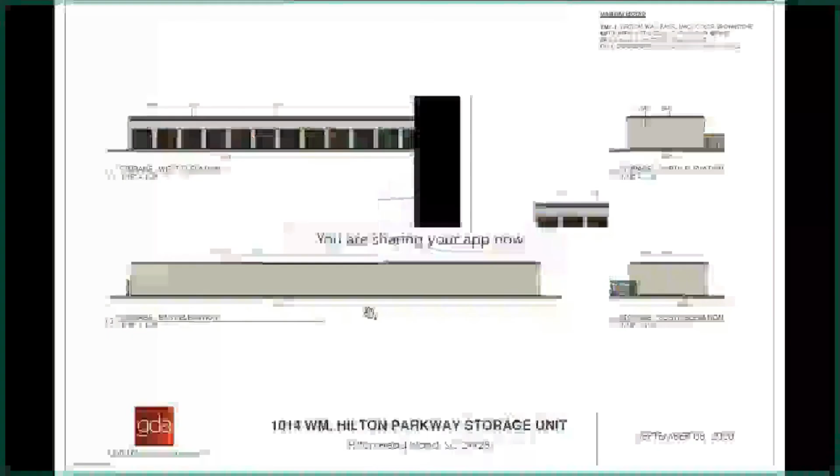And I guess one of the other questions - I realize it's conceptual, and I cannot read - is what is happening with, I'm assuming these are rooftop units. Is there a parapet that is presuming to hide all of those rooftop units? And then the other question I have is, is there a service yard? I may be missing that it is. I guess I presume that a building like this would have a service yard. And I think, while I fully understand that you have to get above flood elevation, really looking at how the ramp at the front facade is integrated into the architecture of the building - to me that is a critical component in developing a nice pedestrian experience to a building.

Let me know when you want me to jump in, Chris. If you can just go ahead. Thank you, Nicole. Can you go ahead and give us? Sure. So outdoor storage as an accessory use is permitted in the LC zoning district.

It's permitted with conditions. So each outdoor storage area shall be incorporated into the overall design of the principal structure on the site and shall be located to the side or rear of the principal structure. The outdoor storage area shall be screened from view from all property lines and adjacent rights-of-way by a combination of an opaque fence, wall, or landscape berm that's at least 6 feet in height. And then the materials in the outdoor storage area shall not be stored higher than the height of the primary structure. So those are the conditions that go along with outdoor storage.

So that fence that you were mentioning within the setback, it cannot be within an adjacent street setback unless it's 4 feet in height. So if that is the setback that you're talking about, it would need to be moved back to behind the setback line so that it can reach that 6-foot height and meet that condition for the outdoor storage.

That's also, Nicole, the fence that we were talking about was on the side. And so it would have to be outside of that setback on the side as well, correct? Well, it can be up to 7 feet in height along or on the common property line. So if it's on the side, it does not need to be behind the setback if it's on the property line. So if it cannot be located on the property line, then yes, it would need to be behind the setback. Okay, thank you. You're welcome.

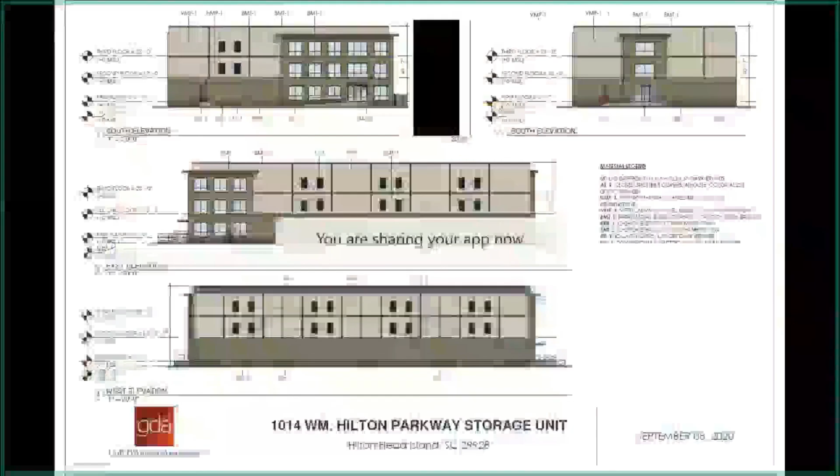To pick on some positive notes on the 3-story component there, I like that little bump out that you guys introduced at the main entrance and also on the back. I think there's some opportunities to continue to work with that to make it look a little more interesting, and that might be where the opportunity is to add the pitched roof in those locations to make it feel a little more friendly and soften things up.

To pick on the single story element, again, I'm going to struggle with trailers and boats parked there, so close to Sea Pines Circle and the beauty of the island. So definitely want to make sure that whatever fencing and landscaping really needs to satisfy that point.

The south elevation of that single story that we're looking at, I guess that would kind of greet you as you're driving along 278. Maybe do some similar things there to what you did on the 3-story, where you're having that wrap a little bit to make that feel a little more appealing than just looking like the side of a trailer that was really value engineered with nothing going on there.

The west elevation is definitely way too monotonous. The east elevation there would pretty much be visible, I think, from Panera, although you had mentioned there's going to be a fence there and all that kind of stuff. So I don't know if it's overkill to break up that plane or add some materials, and maybe all that is hidden with the fence. I'm not sure, but if not, I definitely think that needs some work.

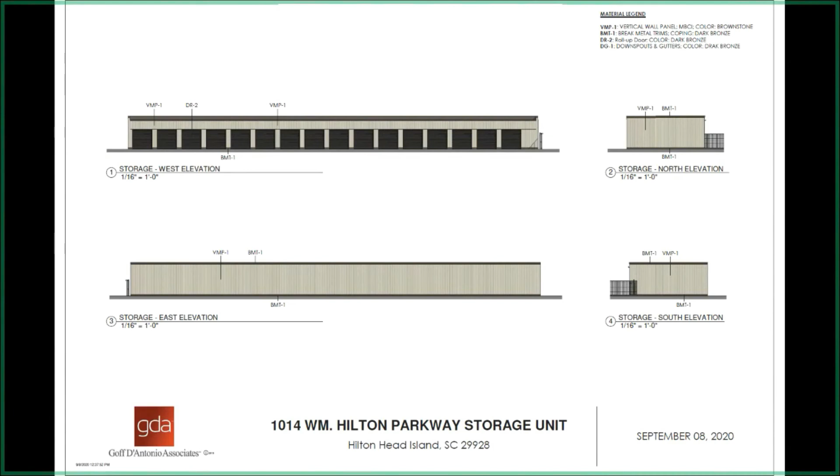I could see in the future Dunnigan's perhaps being developed and being a little larger of a thoroughfare. So I think it's our obligation to make sure that we don't just focus on screening things from 278, but also make sure we give Dunnigan's Alley that same attention. Those are all of my comments for now. Thank you.

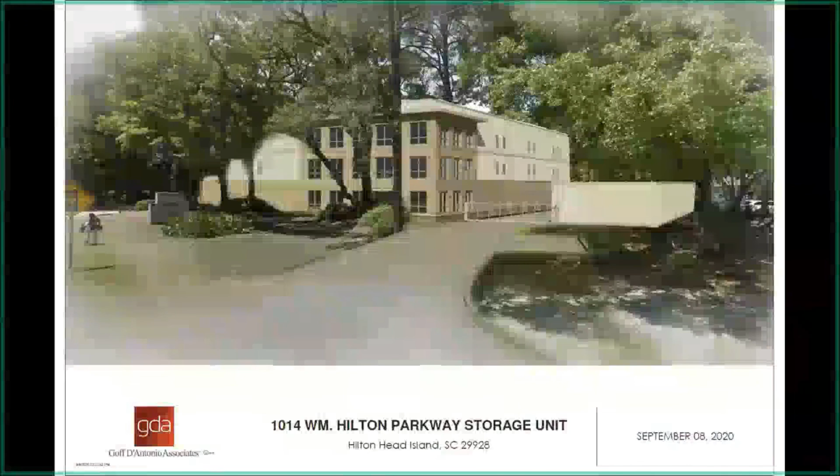But David brought up really great points about the landscaping and also breaking up the roof line. I think he did okay with bringing out the front corner of the building and bringing up those windows, but it's just a flat building all the way around. The flat on the right, the flat on the main building, it just doesn't go with island character. We don't really go with flat buildings here, and I just think it's wrong.

Outdoor storage, I don't agree with in any way, shape, or manner. So if you have to have outdoor storage, and if it's allowed, it needs to be hidden completely from everyone's view. And I agree with Annette and staff comments. Thank you.

All right, thank you, Ms. Foss. Yeah, everybody stole all my comments. The building's just...

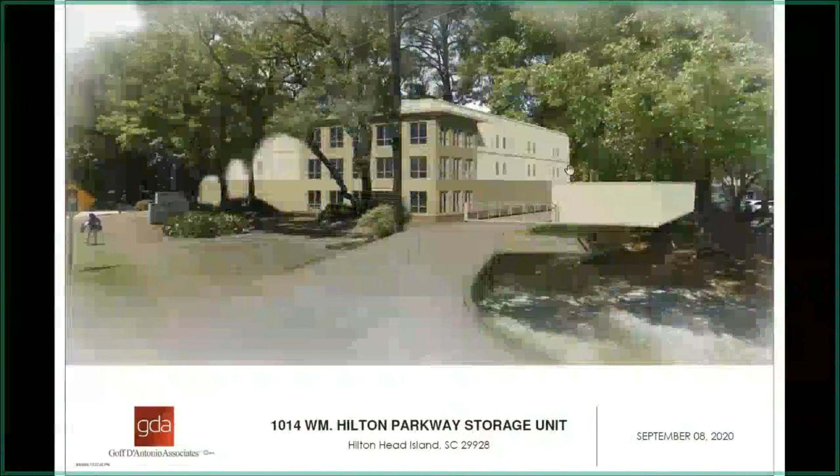It's just all wrong. It needs to have a roof on it. The phase 2 building, there's no reason that should not have a roof on the whole thing. It's small enough. And the big building has to have some sloped roof on it. Like everyone's pointed out, it's too flat, it's too blank, it's too everything.

Are the wall panels precast, metal? What are the VMP ones? Can anyone on the applicant side answer that?

This is Eddie Buck, I'll jump in. Materials for the building are slated to be brick, and then using decorative metal panels and trim work in a horizontal and vertical pattern to break up the massing of the building, with louvers down the side of the building. Those would be bronze louvers to serve almost like a window penetration. The main entry is glass storefront that would give it more of an office type look versus just a square building. The one thing we have to remember in this application, we work on a 10 by 10 structural grid, so everything we do has to be based upon those movements.

Okay, well I have no problem with the 10 by 10. Exposed metal panels, we'll obviously have to see those. I remember our discussion on the smokehouse where they used some on a very limited area of the building, and that was a huge point of discussion. So we'll need to see those, obviously. But this building has to look like it's an office building.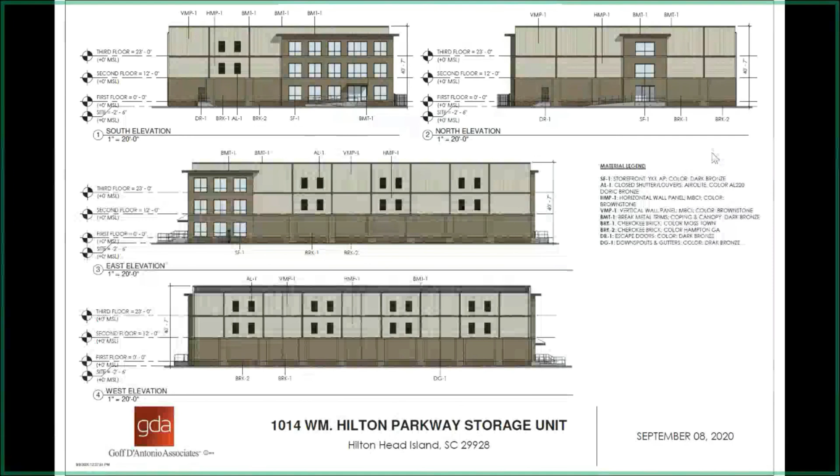Is there a gate on the, I assume there is. Is there a gate off of 278? There is. Also, to your comments about putting a roof, we're willing to look at and study the perspective, that elevation from 278, of how we can integrate some kind of sloping roof, and also trying to make it look more pedestrian friendly.

Also, you got to realize this is not really a great rendering. We're well beyond the 50-foot buffer. There's a lot of plantings in that 50-foot buffer and significant trees, and the goal is to even enhance that more and more. So this is not going to be a super highly visible building, but it's something that we want to represent the Low Country, that we can all be proud of. So we're willing to further study that elevation.

Okay, and that front gate can't look like a chain link fence on casters, which is what it looks like. That's got to be something nice there. So yeah, I think it needs a lot of work, and the comments have been given. Outdoor storage needs to not be seen, and that's part of the LMO, so that'll hopefully take care of itself.

Typically we reinforce foundation plantings between buildings, between hard surface and the building. Now on phase 2, where you'll have garage doors, we can probably get away with not doing that, so you can get in. But that whole driveway on what will be the right side of the phase 2 one-story building, coming off of William Hilton Parkway, we got to soften up that edge with some landscape there. We can't run the pavement straight up to that blank wall. There's got to be a 5-foot buffer in there of plantings.

And everything Mr. McAllister said just looks like a big solid area in the back of pavement. Nice if there were some more plants inside. I know this is a private facility, but I don't know how the board looks at that versus if this were a restaurant, for instance, or some boutique shops. We would definitely require more plantings in that contained area.

Chris, is there anything LMO-wise that makes it different on the usage as far as plantings within a parking area?

I think what's going to catch it is the screening and the requirement that everything stored in that exterior lot, open air storage, is going to have to be 100% screened per the LMO that Nicole read. So they're going to have to meet that requirement. But there is no requirement to add additional trees. That's not saying you all can't move in that direction, but there's no requirement in the LMO that they do that.

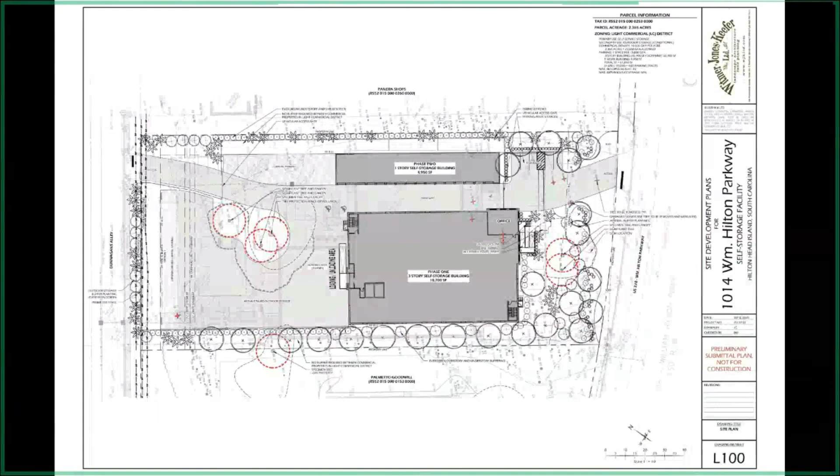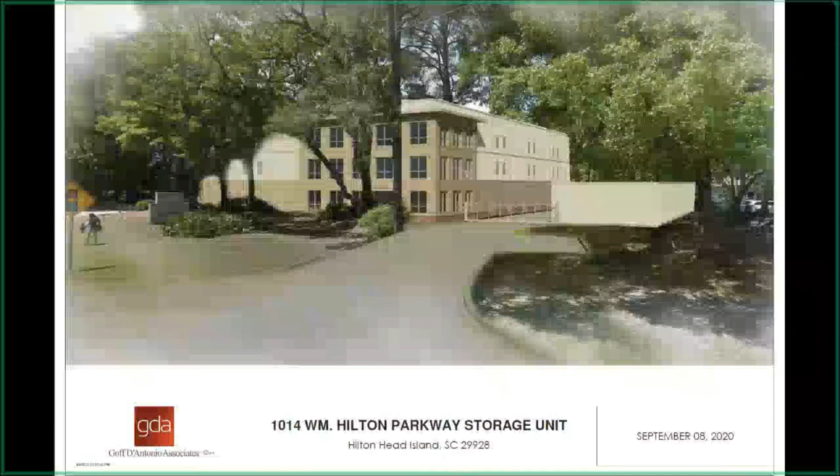Chris, if you could go back to the rendering—I had an opportunity to see it up for a little while, and it brought up some questions that are probably more code related but will affect the aesthetics. I'm seeing that phase 2 single story kind of hovering in midair. I realize it's a rendering superimposed on a photo, but does that single story storage have to be above flood elevation? Because if so, I'm wondering how that's going to be achieved and how it will change the aesthetics of the massing of the structure.

Hey Nicole, do you have an answer to that question? Yes, as far as I'm aware, it does need to be above the base flood elevation. And if it's not above base flood elevation, it would have to be constructed with flood-resistant materials. So I would defer to the applicant on what they're planning for that.

I would think if it's conditioned, that would have more of an influence on things versus non-conditioned, perhaps. The initial intent there is for it not to be conditioned space, and at the time we build that building, we will make sure that it meets the then current floodplain requirements.

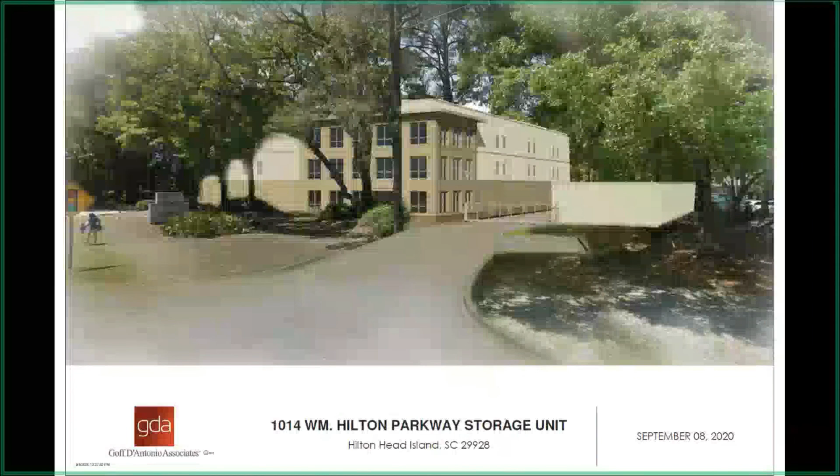All right, Ms. Teresa, would you please run roll? Certainly, Mr. Chairman. Ms. Lippert? Yes. Ms. Foss? Yes. Mr. McAllister? Yes. Mr. Molesky? Yes. Mr. Gensman? Yes. So the motion to table passes unanimously.

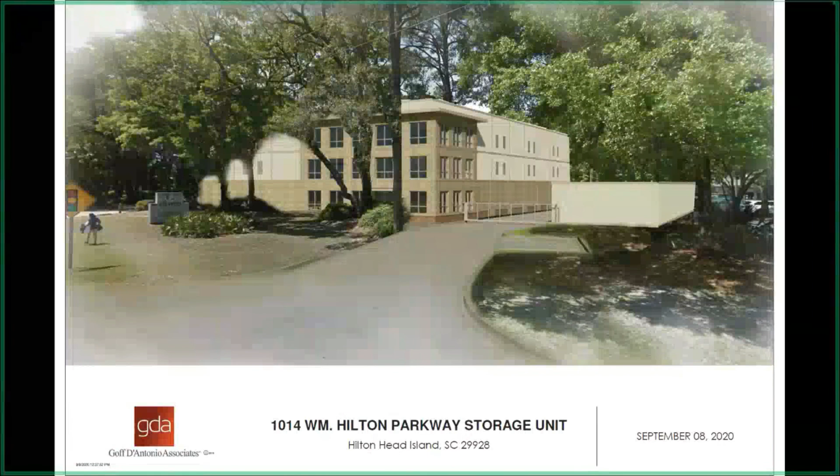No hands. All right, Chris, do we have a minor corridor report? There were no more minor corridor approvals since your last meeting.